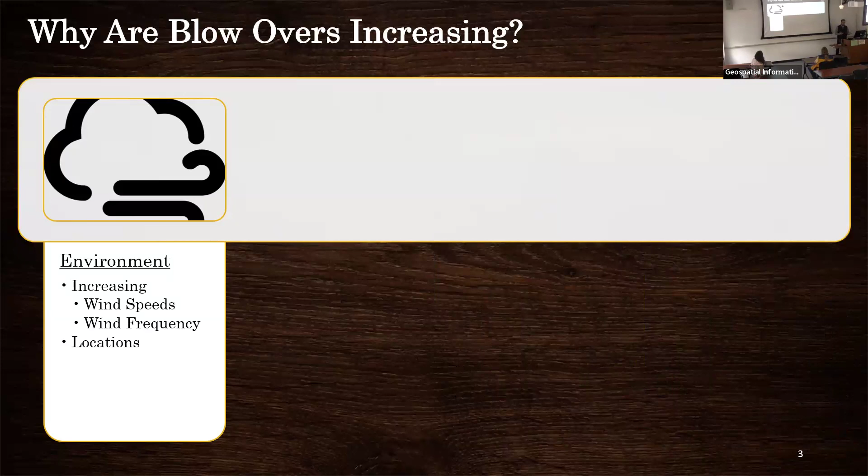So let's talk about why blowovers are increasing. We have some environmental factors like wind speeds, wind frequency, and the location of wind events. We have environmental change. We have drivers, and changes in how transportation models things.

We have things like just-in-time delivery. You all saw that during COVID when there were no supplies - we have no margins left in our warehouses and all that. So there are incentives for drivers to get from A to B on time and quickly.

We have some complacency from National Weather Service and whatnot. Maybe we've been a little lax on what we consider when enforcing closures.

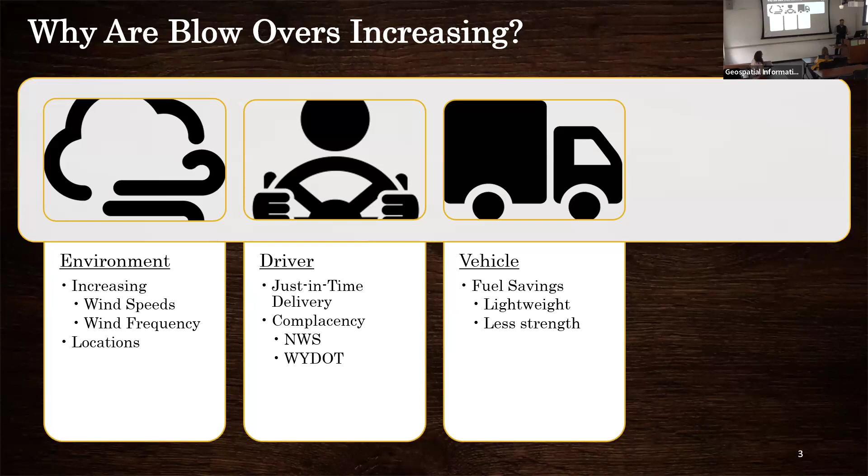The vehicles themselves have changed, and for mostly good reasons - they've gotten lighter, more fuel efficient, but with that, they're not as strong. Consequently, when that vehicle blows over, the likelihood of it spilling its cargo all over the road increases, closing the road for longer. Or even that trailer, if it's empty, cleaning up multiple pieces results in the interstate being closed longer. So while the fuel savings are great, there are some unintended consequences.

There are also changes in Wyoming in general. Cheyenne has gotten new distribution centers, which means trucks are returning empty to those centers to be filled, and it's the light trucks that are more susceptible - we'll go into more detail.

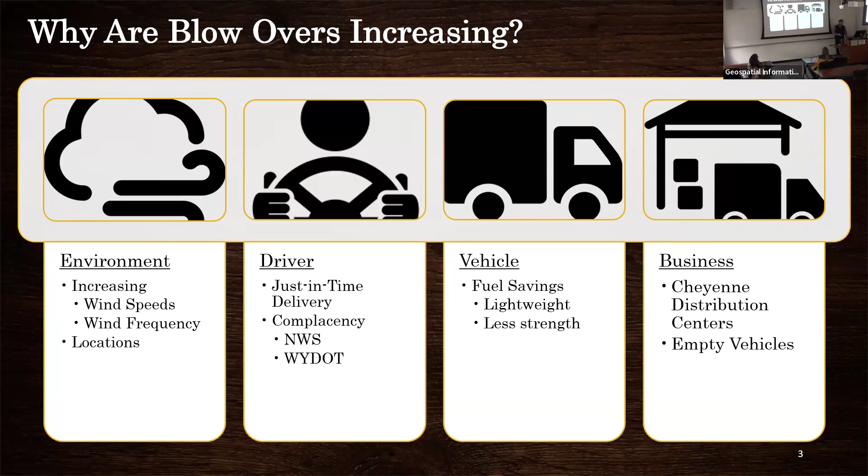So what vehicles blow over? What's the definition of a light, high-profile vehicle? Historically, you've probably seen the signs - Wyoming has said this road is closed to light, high-profile vehicles. Well, what's a light, high-profile vehicle?

If I asked Jason, he'd probably give me a different answer than if I asked Ramesh. What is light, high-profile? It's kind of an ambiguous term. A lot of what we've been focusing on is taking that ambiguity out and clearly defining what vehicles this affects. Sorry to pick on you, Jason.

So just a quick timeline. This all started in May 2023 when the Joint Transportation Committee was critical of the I-80 issues and how long the interstate was being closed. In July 2023, the executive staff at WYDOT got a blowover briefing on research done right here at the University of Wyoming by Dr. Ohara, who's with the engineering department. Later in July, there was the first meeting with the executive staff within WYDOT.

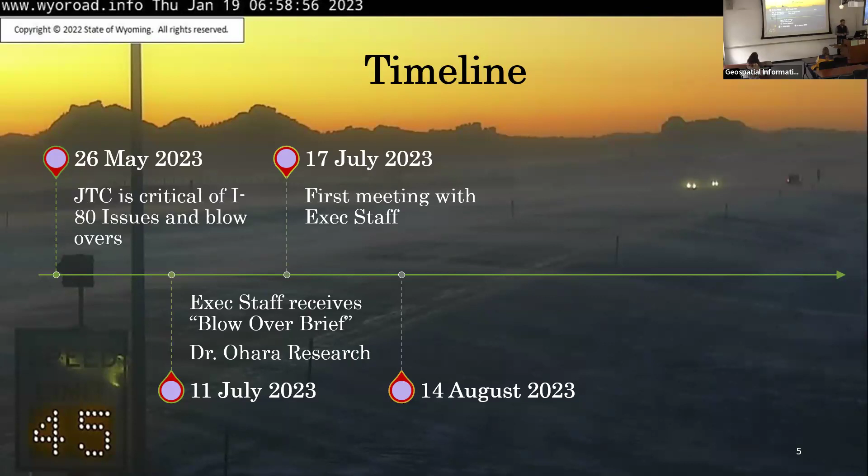In August, moving fairly quickly, we got some buy-in from the Wyoming Trucking Association, which was an important move. Near the end of August, there was a presentation to the Joint Transportation Committee with a proposed solution. And in October 2023, we had our first weight-based wind closure.

So this is the first time we've gone from light, high-profile vehicle to vehicles under 40,000 pounds gross vehicle weight. So a shift in how we're labeling the closure to remove some of that ambiguity.

Sorry to interrupt, but just for clarification, is that per a certain number of axles? Because passenger cars aren't included, right? Correct, it's still high profile vehicles. We're focusing on vehicles that are fairly tall. The number of axles isn't as much driven into it. The modeling, which I'll get into more, is very much based on the combination commercial vehicle, which is what you see here with the 53-foot enclosed trailer. It's really where the research is coming from.

But it can be applied to other vehicles with similar shape and configuration, like an RV or a motor coach. But it's still up to the driver to decide if they're high profile or not. Yes and no - if it's over a certain height, there's some things, and truckers know, but there's some gray area maybe. Right, so we're very focused on the commercial traffic. For sure, sorry to interrupt.

No, and those are all great questions, and I'll plan to hopefully address some of those. In theory, could a non-commercial vehicle that's still high profile fall afoul of the new rules if, say, they decide to drive on the road and get blown over? I'm not going to speak about what the highway patrol would ticket them for, but potentially based on the language of the bill that just passed.

Yeah, we'll go. I have family that has a pretty big trailer that they haul around. And we have had several of those blow over - I mean, not probably their trailer, but we've had several blowovers that are not commercial vehicles.

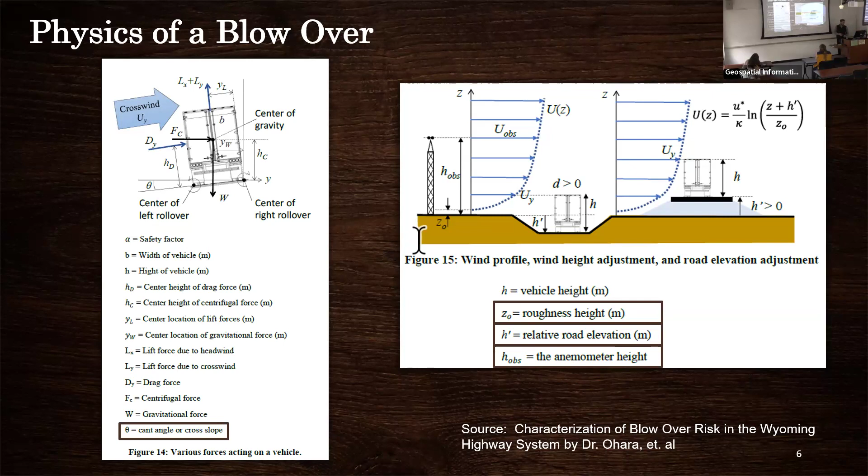But we have some variables that I would call spatial variables. So we have the angle of the roadway, and I'll show that in just a minute. We also have the roughness height, the relative road elevation, and the anemometer height above the road. So these are all variables that vary over space, not necessarily over time. The vehicle doesn't necessarily change weight as it's going down the road, but the angle of the road might change.

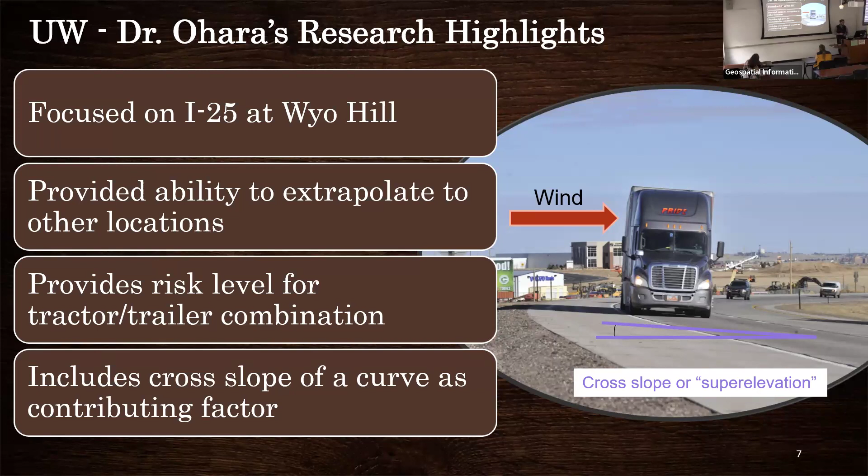Nick, on that slide - does the vehicle speed matter at all? Yes, it does matter.

For our static table, we're using 75 miles an hour, which is generally the speed limit. But yes, the speed of the vehicle does matter. That's a fantastic observation.

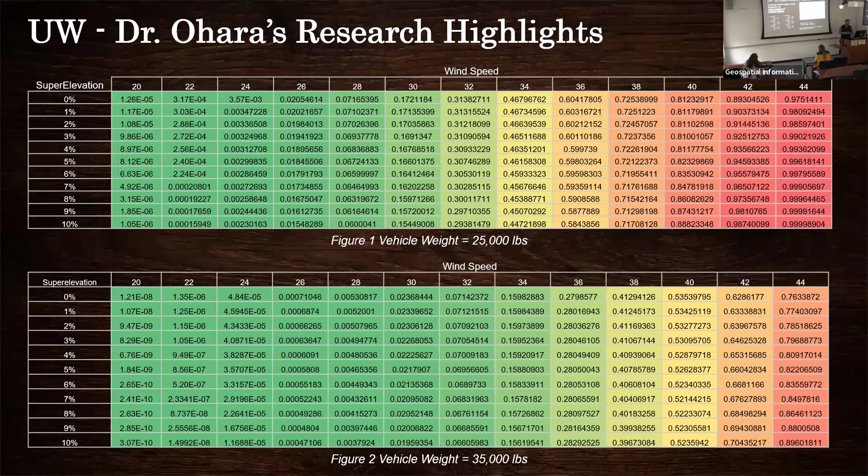The other thing that matters is what direction the wind's coming from. If it's a headwind, the truck will be a little more stable. If the wind is coming from a cross section, or a direct cross section, or a slight headwind, that's most significant. So in this slide, at 30 miles an hour, it has to be pretty much right on, and there's not a lot of variability.

This is based on a 30,000 pound vehicle. If the wind increases to 40 miles an hour, we've increased the cones on either side by 60 degrees, and that's going to keep increasing. At 44 miles an hour, we've increased that northbound and southbound cone by 90 degrees. So at 44 miles an hour for 30,000 pounds, the wind direction is no longer a factor — it's the wind speed that's driving.

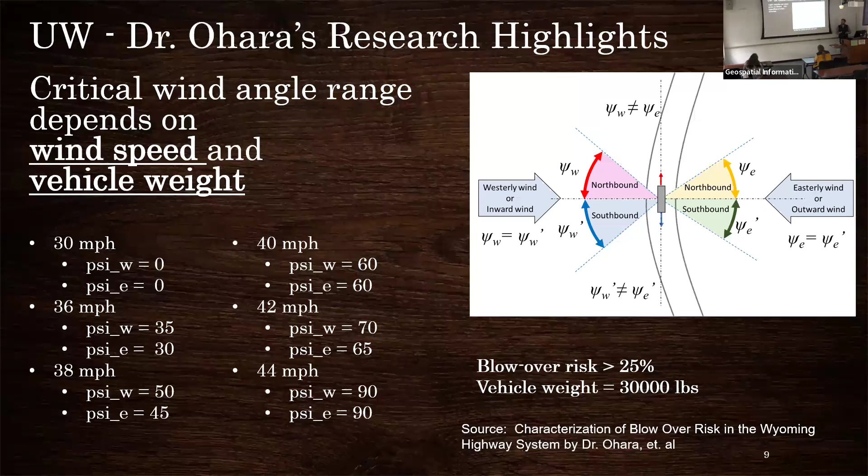Let's look at what that looks like on the landscape. This is an area along Elk Mountain, modeling an unrealistic 10,000 pound vehicle. You can see here we have a base wind — our model starts at 20 miles an hour. We have our base cone, and at an increase to 24 miles an hour, those angles have increased significantly — we're almost at 90 degrees.

At 26 miles an hour, going in 2 mile an hour increments, we've passed 90 degrees — that's 90 degrees plus the variation in the road surface. So for 10,000 pounds at 26 miles an hour, the wind direction is no longer relevant for this particular site. That vehicle is within our risk threshold.

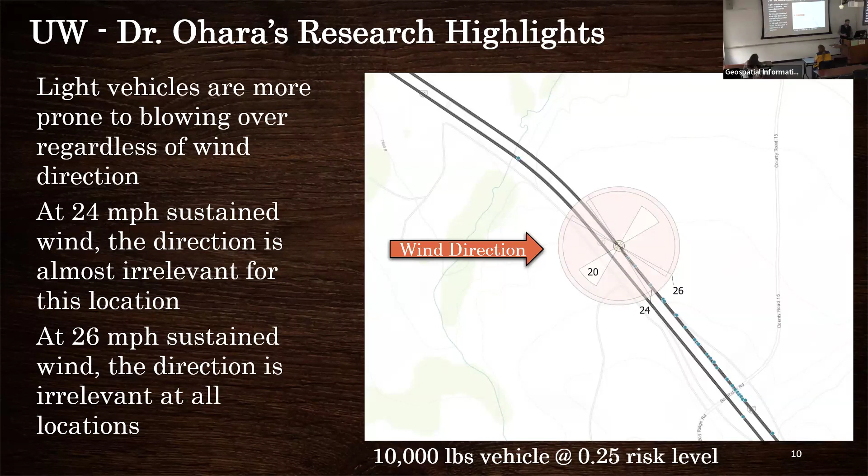Now let's do the same thing but look at 45,000 pounds. Everything else is the same — all we've changed is the weight of the vehicle. You can see at 20 miles an hour, even at 46 miles an hour, it has to be at a true 90-degree angle for it to really be of concern.

At 48, that's when we start adding degrees of increments, and we're going to increase that. So at 50, you can see that cone is increasing — just like that slide I was showing you, this is just a little bit more visual. We're going to keep going.

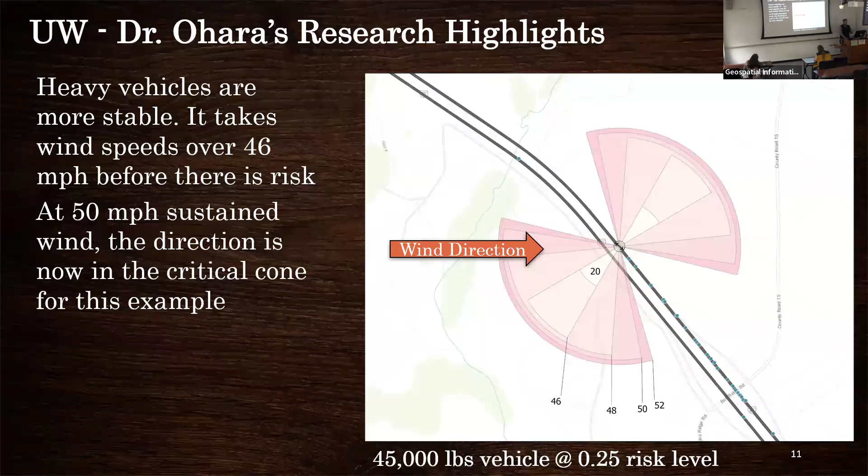At 50 miles an hour, this wind is now in our critical direction, and we keep increasing — adding degrees onto that cone of criticality right up until we get to 68 miles an hour, for 45,000 pounds. That's when you've got to that 90-degree increment, and since we have some variation in the road, it's past 90 degrees and the wind is no longer relevant.

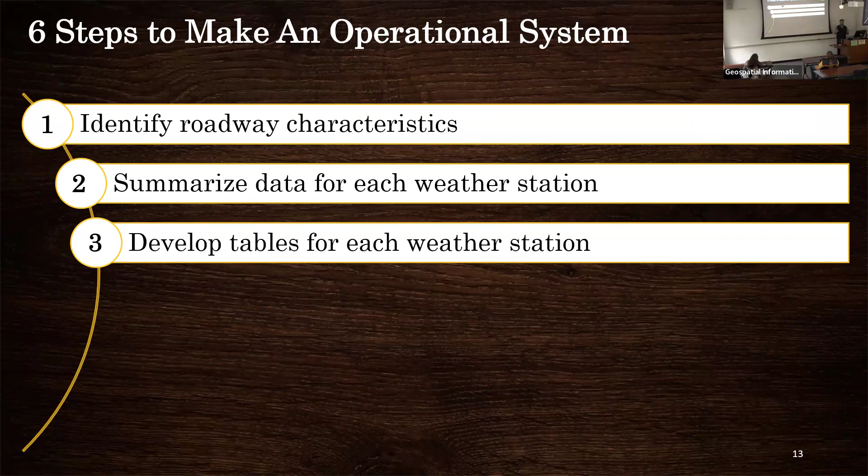So how do we take this research and turn it into something that WYDOT can implement? We came up with 6 easy steps. First, identify the roadway characteristics — the super elevation and direction of travel. Next, summarize that data for each of our weather stations. Develop tables — wind, weight, direction tables for each weather station, which I'll go through. Link those tables to the real-time wind speed and direction, then provide real-time information to our decision makers, that's our transportation management center, and finally get that information to the public. Six easy steps, I promise.

Each one of these steps, as you can imagine, is a little bit harder. For identifying the roadway characteristics, first we looked at 5 years of crash data — you can see in this map the little orange dots are crashes. Then we compared that to our weather stations, and if a weather station didn't have a lot of crash data, we supplemented it with samples every tenth of a mile from that station, plus or minus 2 miles. Each color here is a different weather station, so we're associating roadway characteristics with the weather stations nearby.

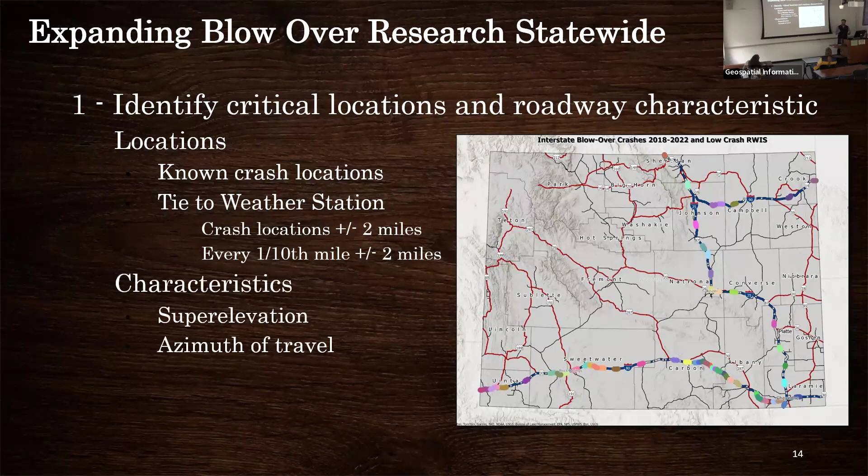And the characteristics that we're really focusing on are super elevation that I showed you, that angle of the roadway, and then the direction of travel. So those are kind of our two critical things that we're looking at. So how do we get that super elevation?

How do we know what the slope of the road is? Well, it turns out WYDOT had contracted with a company called Cyclomedia, and they drove our roads to create a product that they call Street Smart. I'm not here to plug Cyclomedia. The important thing is when they drove it, they had side scan LiDAR. I now have LiDAR for our entire road network.

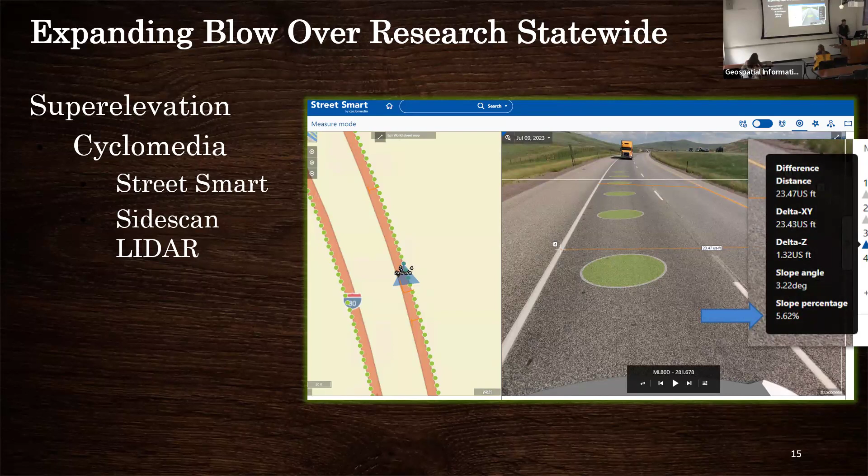So I can use that LiDAR, you can see here, to measure across the roadway, and it gives me this slope percentage. So now I know for this particular crash, that super elevation is 5.6%. So I can take that data and tie it to our crash data.

So we're taking the roadway characteristics of the road within plus or minus 2 miles of that weather station, and we're creating a worst case scenario for that particular weather station. Because we don't really care what the weather at the weather station is, we care about what the weather at the worst case nearby road condition is.

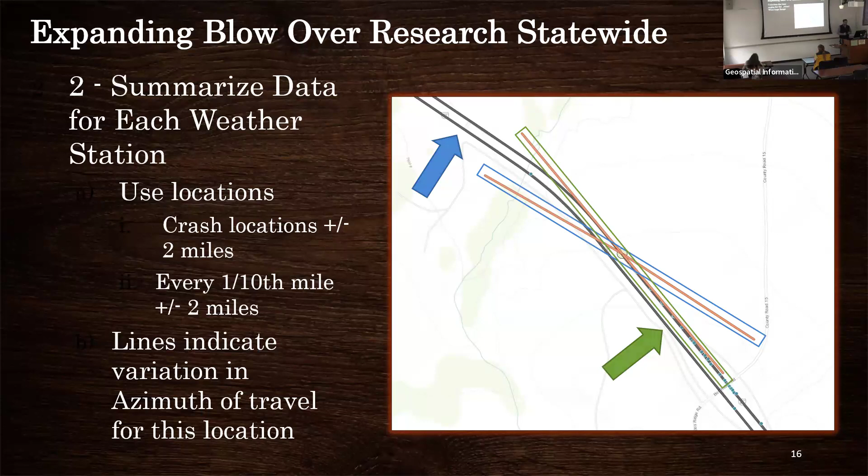Once we have the direction of travel, we can calculate that critical cone. So we have our azimuth of travel, which is the orange lines. Turn that 90 degrees to get our first critical angle. Then, to keep things simple, I used 15-degree increments for the wind. So I round the lower angle down to the nearest 15 degrees and the higher angle up to the nearest 15 degrees, increasing that critical cone until it meets our 15-degree increments.

And that's where you saw these little charts. That's where that comes from, developing those critical cones based on the variation of the road within that weather station.

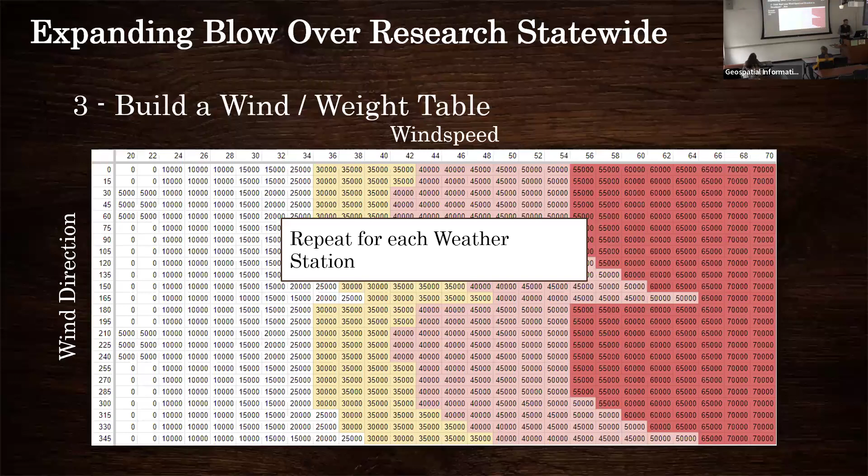So we've got 70-some odd weather stations, just a small sample here. You can see each one looks a little bit different. So how do we link the real-time weather data? We have weather data coming into our database, so we can do that.

So in this particular example, let's say the wind is coming from 145 degrees. I'm going to read the 135-degree line and the 150-degree line, because it falls right in between those, reading both above and below to get the worst case scenario.

The wind speed is 43 miles an hour, so we have 40, 42, and 44 as our reference columns. Where do we put 43? For a factor of safety, anything above 42, even a tenth of a mile an hour, gets rounded up to 44. So we read that column, and now we've got 35,000 pounds, 35,000 pounds.

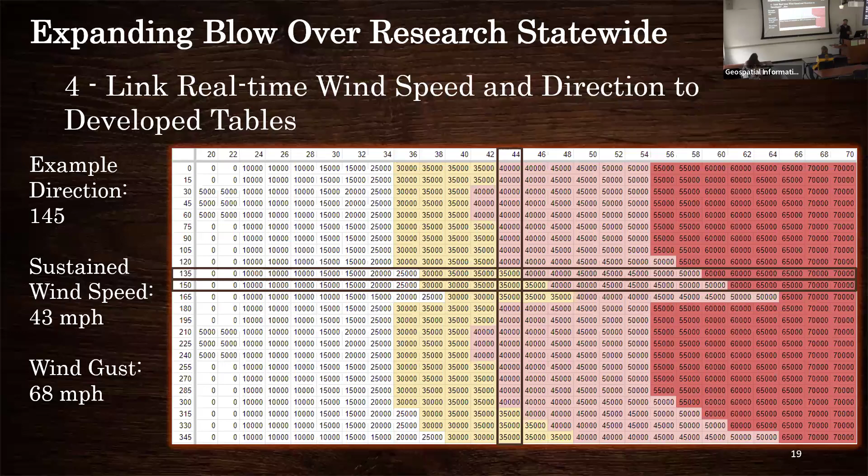Oh, our wind gusts are 68 miles an hour. Do we just read the 68 mile an hour column? It turns out that when Dr. O'Hara did the research, his model outputs were based on the wind gust being 150% of the sustained wind. So that's a simple mathematical relationship.

We can take the inverse of that, taking two-thirds of the wind gust and treating that as the sustained wind. So in this case, 45.3, which gets rounded up to 46. Now we've got our box of 4 values: 35,000 pounds, 35,000 pounds, 40,000 pounds, and 35,000 pounds. We report the maximum of those, which is 40,000 pounds.

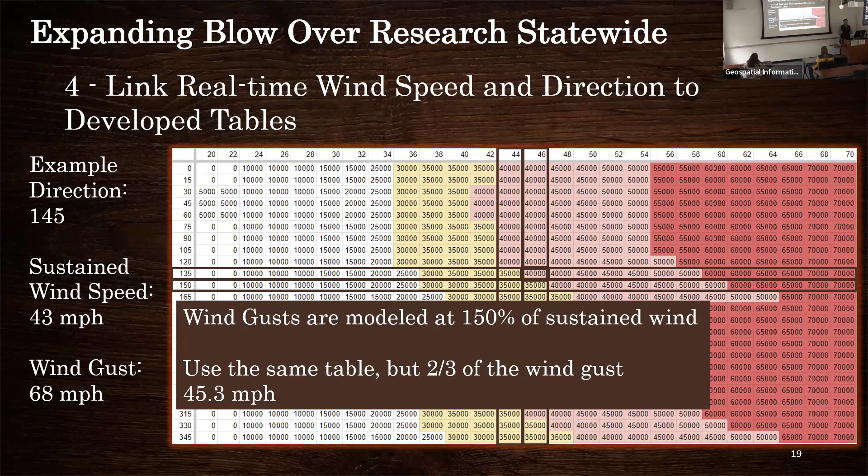So for these conditions, the minimum weight that the vehicle could have for a light, high-profile vehicle is 40,000 pounds gross vehicle weight to be within our thresholds. I've done that for all of our weather stations along the interstates, and you can see it varies.

So this one's at 40,000 pounds, 25. There's quite a bit of variability based on the wind speed and wind direction at that particular site. So what we want to do is look at that as a holistic picture and get an idea of what we need for that section.

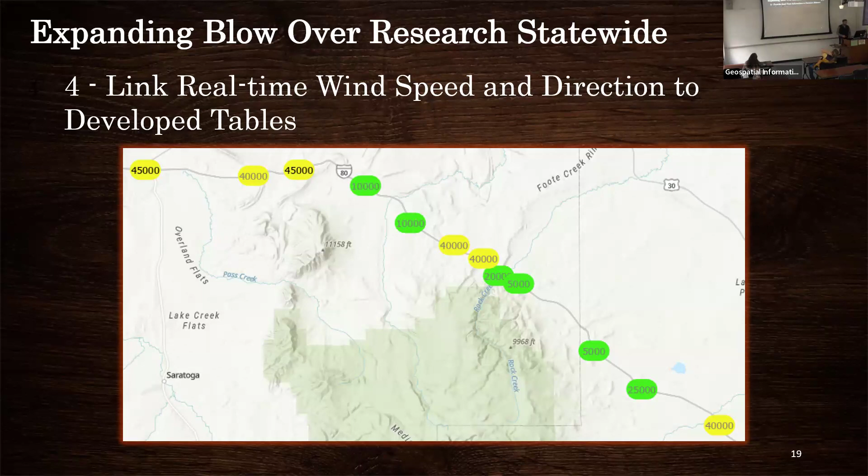So the next step is to get this into the hands of our decision makers. Right now the decision makers are our transportation management center. This is a big room, looks like a dispatch room in the basement of a building in Cheyenne, and they're the ones that actually close the roads. They're the ones that post messages on the signs. They're the ones that have the power to do this sort of stuff.

Our TMC also can get some Trac messages. Trac is just kind of an interactive feed about what's going on—crashes, changes in conditions, that sort of stuff. These are just notifications to that transportation management center.

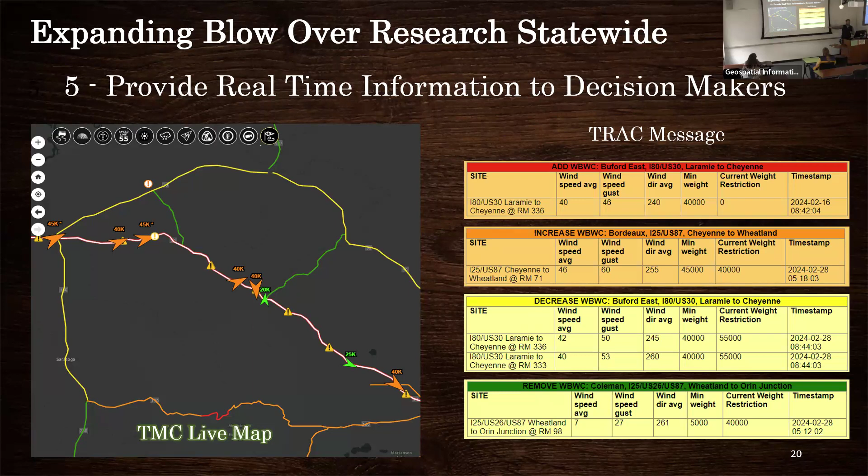So how do we get that out to the traveling public? We have a couple of things already in place. We have our commercial vehicle operators portal where we can get this information out. We have roadside systems—you guys have probably noticed the messages overhead have changed, and they now include things like enclosed trailers or high profile vehicles under 40,000 pounds or under 50,000 pounds. So that's one thing we can do.

We also, Wyoming was part of a pilot project for connected vehicles, so we can get that out to our roadside reporting units and get that into the cabs of trucks and other private vehicles that have these in-vehicle systems.

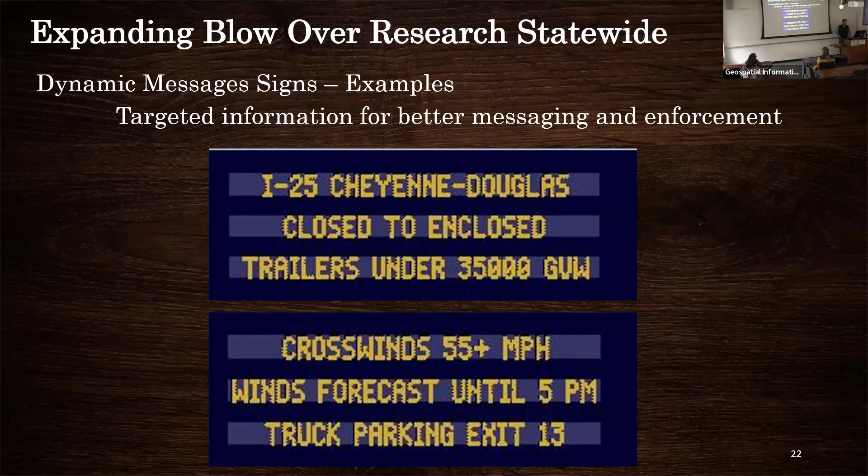We updated our signage, so now you see that Cheyenne to Douglas is closed to enclosed trailers. It's now just high profile vehicles under 35,000 gross vehicle weight, and it gives you some information on crosswinds and various other things.

Where do we go from here? Some things to incorporate: we have our Wyoming Authorized Travel program, and we could build something very similar for wind-based events. So for your example with your parents in their trailer, we could develop a portal where they could enter some information and get a yay or a nay. We'd incorporate this into our 511 systems, the phone, the mobile app, and the notifications—and that's largely happened already.

We've incorporated something called the situational data exchange, a product by Trihydro right here in Laramie that was developed through that connected vehicle project. That actually gets messages out to roadside reporting units and into the connected vehicles. They also have a web interface for people. We have various social media platforms, and then again, that commercial vehicle operating portal.